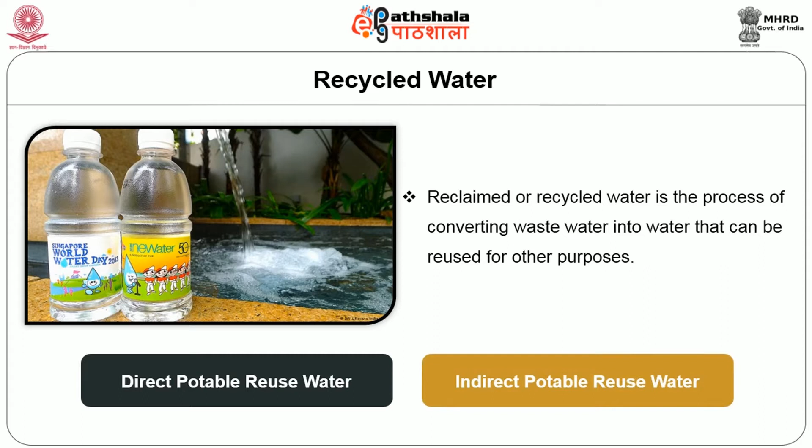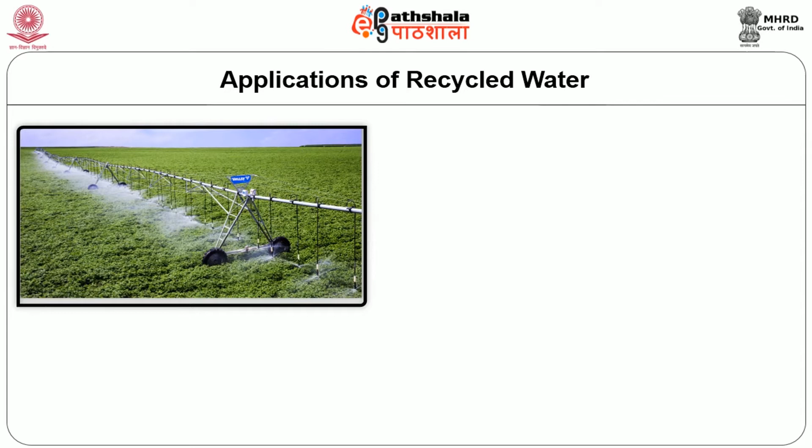So, what are the applications of recycled water? Recycled water can be used for many purposes. It can be used for irrigation of gardens and agricultural fields, replenishing surface water and groundwater, that is groundwater recharge. This groundwater recharge can be a direct one or an indirect one. Water can also be directed toward fulfilling certain needs in residences, for example toilet flushing, in businesses and industry. It can even be treated to reach drinking water standards.

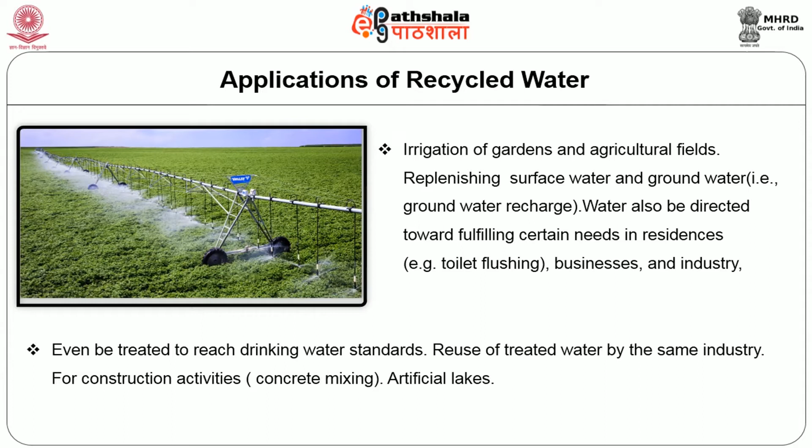Reuse of treated water by the same industry which has polluted the water. The reused water can be used for construction activities like concrete mixing. It can be used to form artificial lakes which will increase the groundwater resources.

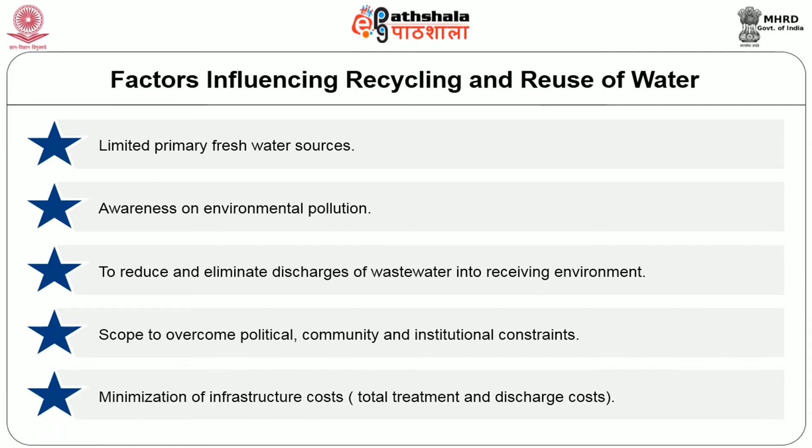Now moving on to the factors that are influencing recycling and reuse of water. As we all know, the limited primary fresh water resources and the awareness on environmental pollution have influenced the reuse of wastewater. To reduce and eliminate the discharges of wastewater into the receiving environment. The scope to overcome political, community and institutional constraints. Minimization of infrastructure cost in terms of total treatment of wastewater and discharge cost.

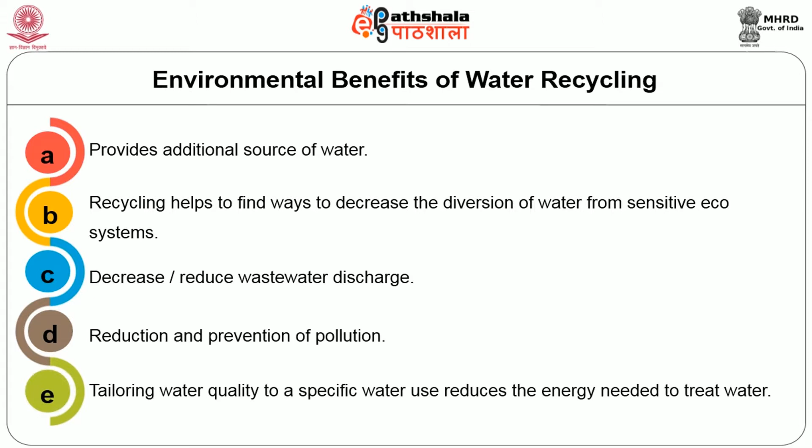Environmental benefits of water recycling. Reuse of water provides benefits to the environment, such as it provides an additional source of water. Recycling helps to find ways to decrease the diversion of water from sensitive ecosystems, reduce wastewater discharge, and reduce and prevent pollution. Tailoring water quality to a specific water use reduces the energy needed to treat water.

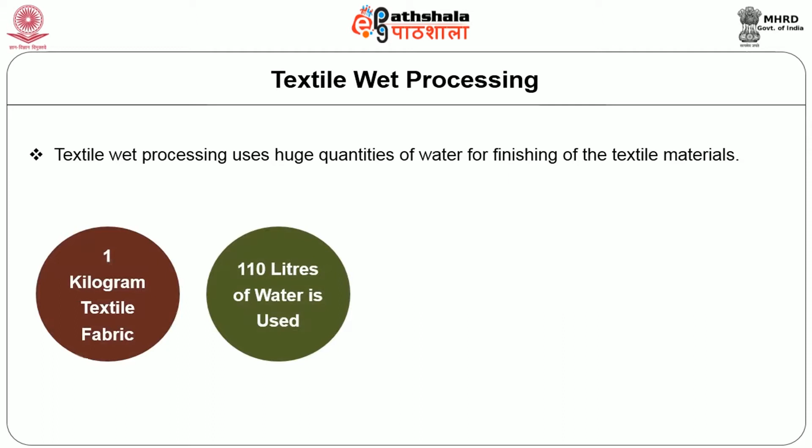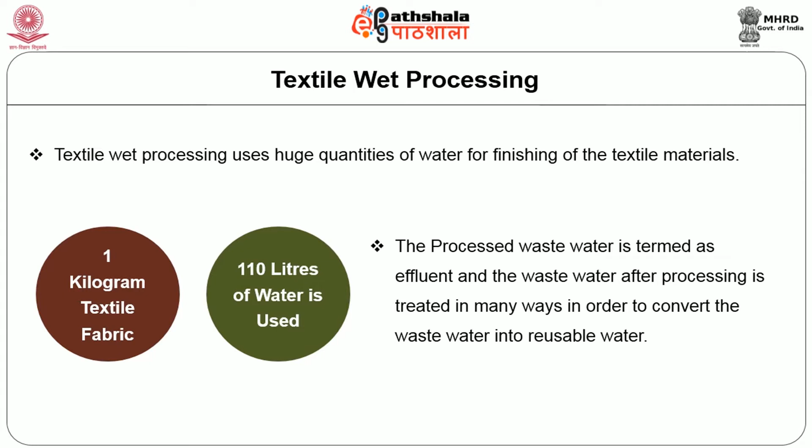Moving on to textile wet processing. Textile wet processing uses huge quantities of water for finishing the textile materials. For treating 1 kilogram of textile fabric, approximately 110 liters of water is used. The processed wastewater is termed effluent, and the wastewater after processing is treated in many ways in order to convert it into reusable water.

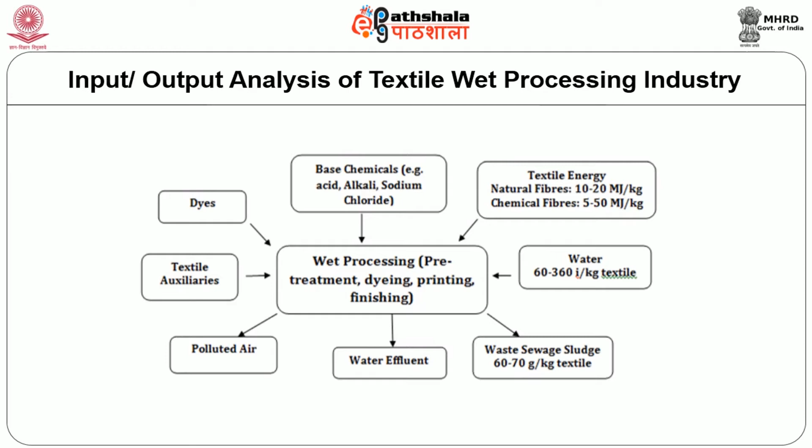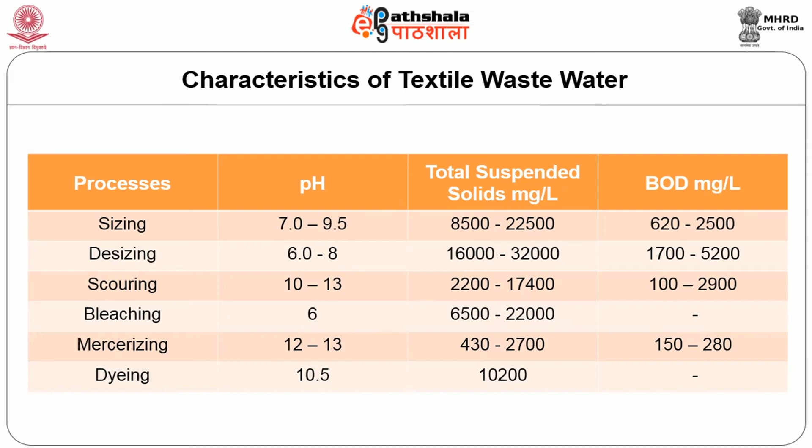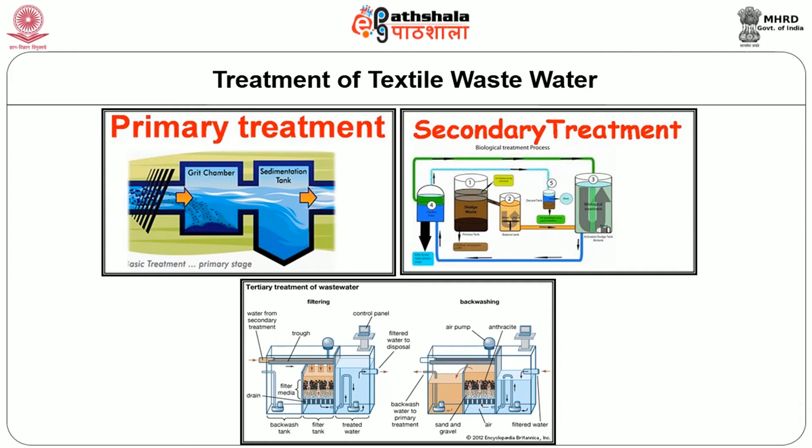So two different treatment processes are carried out in zero liquid discharge. The wash water liquor takes a separate route and the dye bath has a separate route. The wash water treatment includes primary, secondary and tertiary treatment. After the tertiary treatment, the sludge from the wash water is a reject and the wastewater can be reused. Moving on to the dye bath, the dye and other salts are removed by an evaporation process, the water is recovered and the salt remains as solid waste.

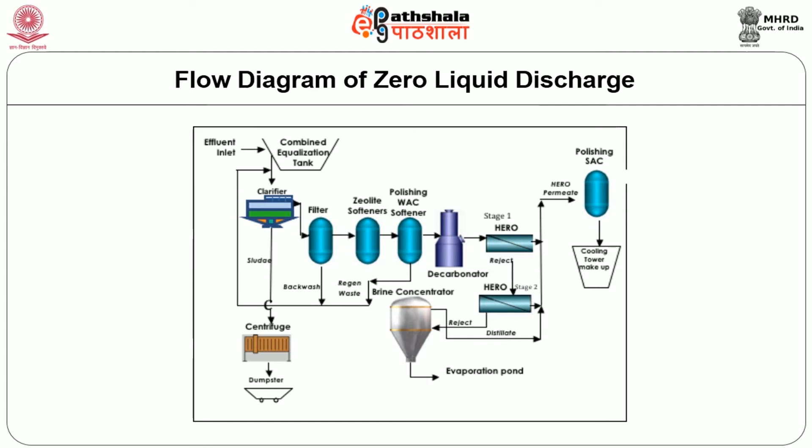And now moving on to the secondary treatment, the water from the primary treatment is taken to the aeration tank where microbes and bacteria will be fed to the aeration tank. After the aeration tank, the water will be taken to the secondary clarifier, and again a flash mixing tank coagulates the bacteria and other chemicals present in it, and the water is given to the tertiary treatment, which includes ultrafiltration

and reverse osmosis. After reverse osmosis, the permeate liquor, that is treated water, will be taken for reuse, and the RO reject, reverse osmosis reject, will be taken to the dye bath effluent.

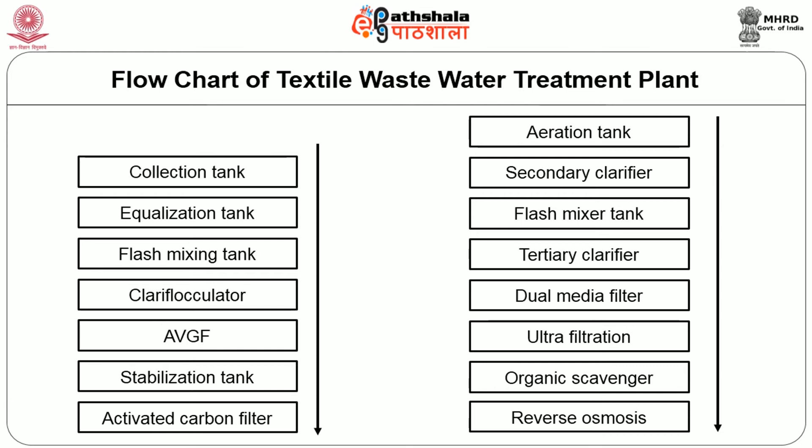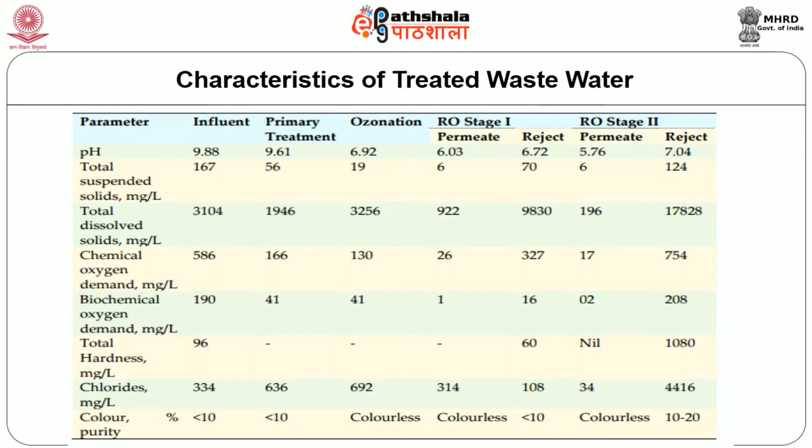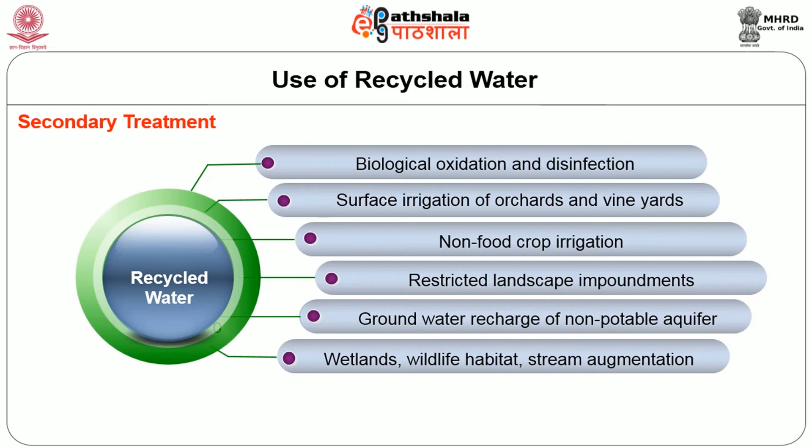So uses of recycled water after secondary treatment, that is after biological oxidation and disinfection: the water can be used for surface irrigation of orchards and vineyards. It should be used only for non-food crop irrigation, restricted landscape impoundments, groundwater recharge for non-potable aquifer, wetlands, wildlife habitat, stream augmentation and industrial cooling process.

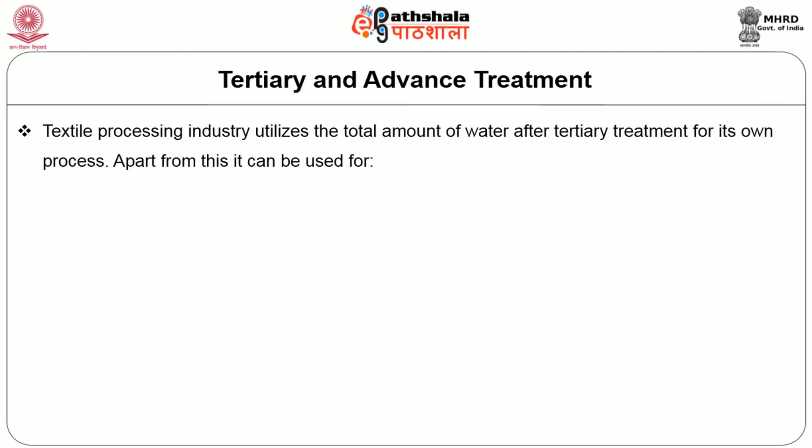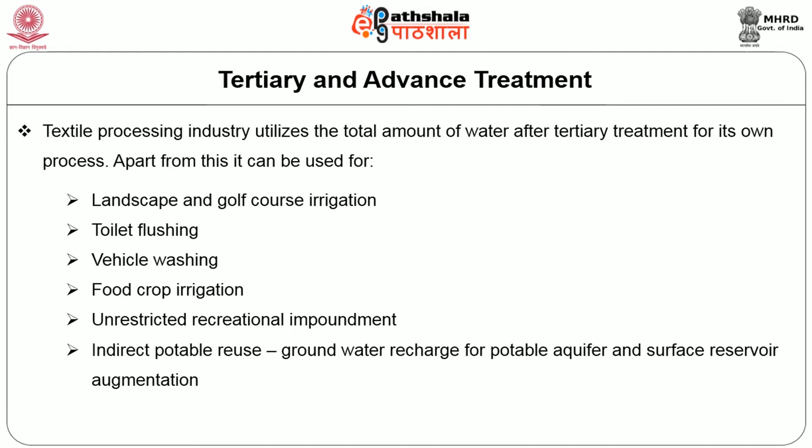So for the treated wastewater after tertiary and advanced treatment, the textile processing industry itself utilizes the total amount of water after tertiary treatment for its own purpose, and apart from this it can be used for landscape and golf course irrigation, toilet flushing, vehicle washing, food crop irrigation, unrestricted recreational impoundment, indirect potable reuse, that is groundwater recharge for potable aquifer and surface reservoir augmentation.

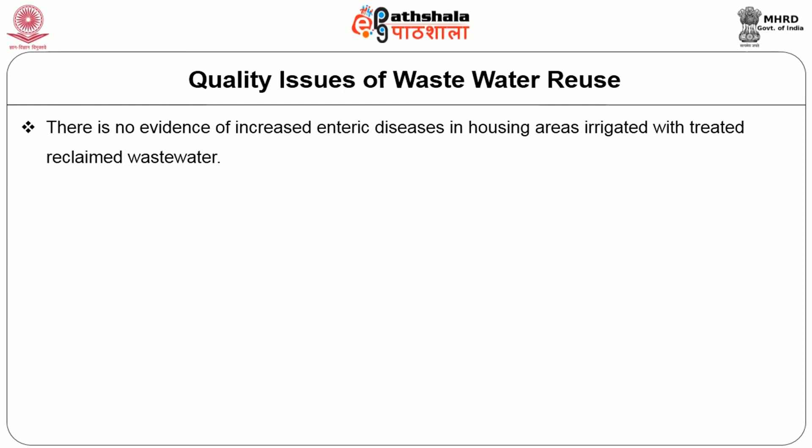Quality issues of wastewater reuse. There is no evidence of increased enteric diseases in housing areas irrigated with treated reclaimed wastewater, and there is no evidence of significant risk of viral or microbial diseases due to effluent aerosols from spray irrigation with reclaimed water.

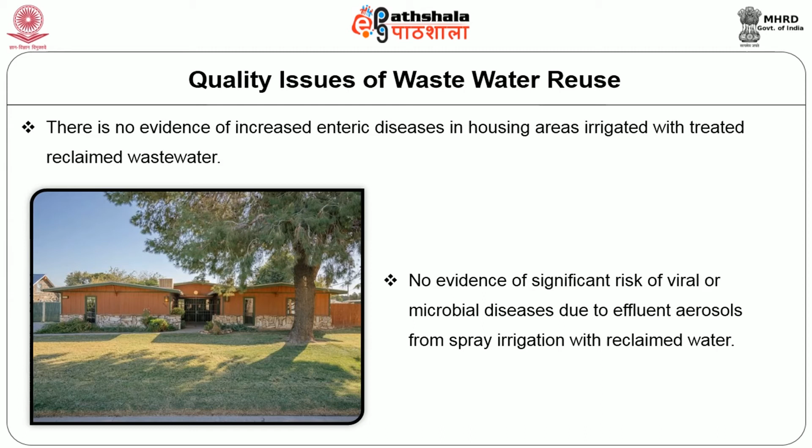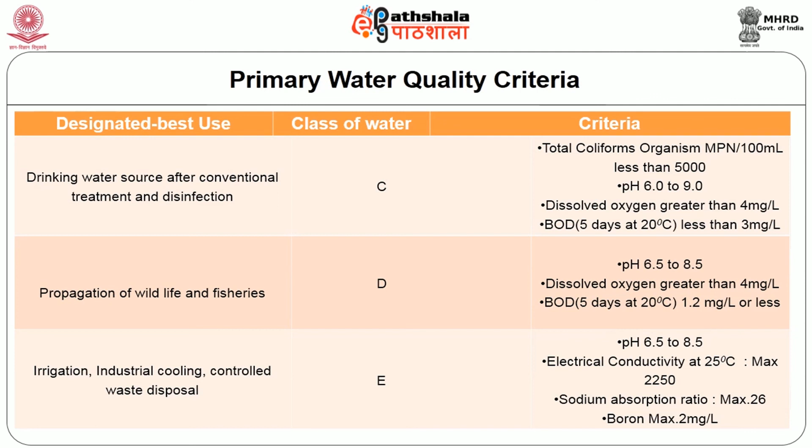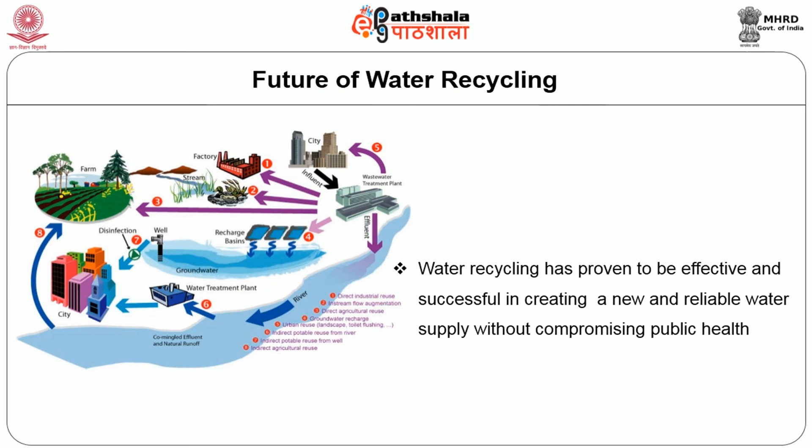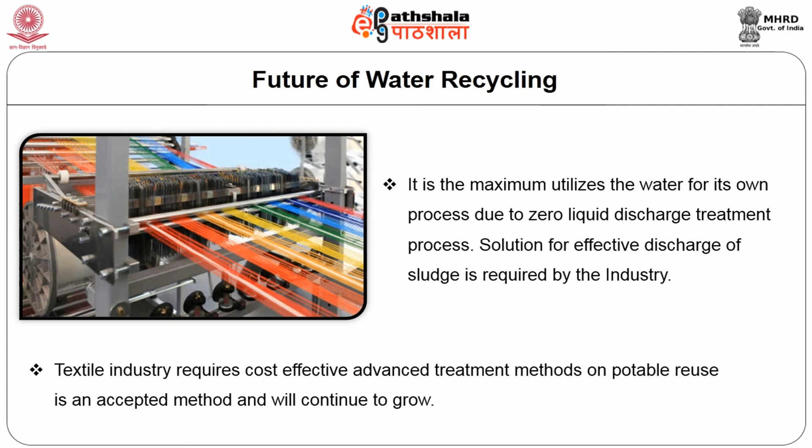So, future of water recycling. Water recycling has proven to be effective and successful in creating a new and reliable water supply without compromising public health. The textile industry at the maximum utilizes the water for its own purposes due to zero liquid discharge treatment processes. A solution for effective discharge of sludge is required by the industry. The textile industry requires cost-effective advanced treatment methods so as to compete with other countries. Non-potable reuse is an accepted method and will continue to grow.

To conclude this session, so far we have discussed the recycling methods and reuse of the wastewater from the textile industry. Though the textile industry adopts several methods to treat the wastewater, it has its own problems. Even though the total treated water from the zero liquid discharge plant is reused by the industry, the sludge generated by zero liquid discharge is a huge problem, and several methods are to be adopted, and research work is highly appreciated for treating the salts and sludge. It is very essential for us to preserve, effectively utilize and reuse water for sustainable growth of industry as well as our country.